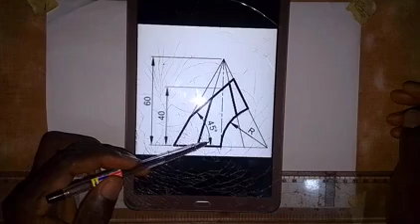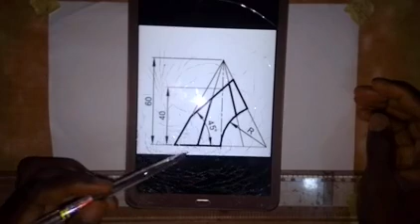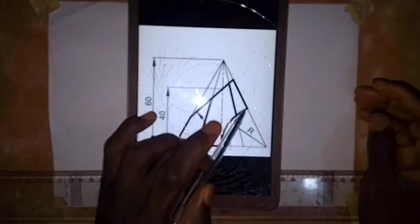This line is the cutting plane, at an angle of 45 degrees to the horizontal. This radius is half of the total distance from here to here, which is supposed to be the distance across corners, though it's not written here, so I'm taking it as 60 millimeters. So the distance across corners is 60 millimeters, which means the radius of this curve here is 30 millimeters, as the curve touches the center line here. So we are going to produce the surface development of this truncated hexagonal pyramid.

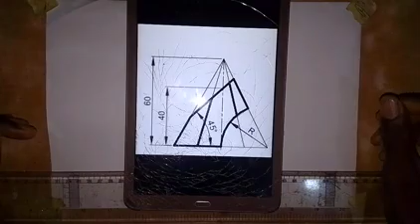Now let's go and see how this work can be done.

The first thing we are going to do is draw a vertical center line. Vertical center lines are drawn with a thin long chain line, always make it a thin long chain line.

Then we also have the horizontal center line.

We are going to take a measurement of 30 millimeters. If the distance across corners is 60, you take 30 millimeters, put it at this point, and then draw a circle. I'm not going to make the circle more visible, so it's okay like this, but I believe you can see it.

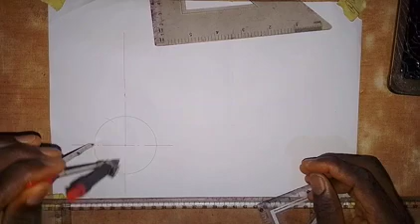With the radius I used to draw this circle, put the pinpoint here, then draw an arc up and down the circle. Then put it at this point and draw an arc up and down the circumference of the circle.

The next thing we are going to do is join these points together.

I just want to do the surface development, so I'm not doing any other thing with this question, only the surface development.

For the hexagonal base, I'll produce it like this. I'm not going to make it thick lines, that's why I'm not using the black pen, I'm using the red pen. So we connect these points together.

Just for us to produce the given view, which is the front elevation. Alright, so we have this. I just want to get the front elevation.

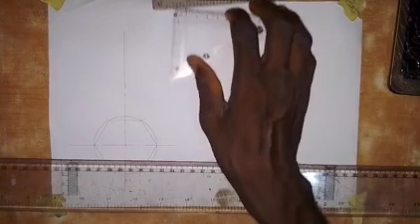Come up a bit and then draw this horizontal line. Then we take a measurement of 60 millimeters, then take 40 on the center line.

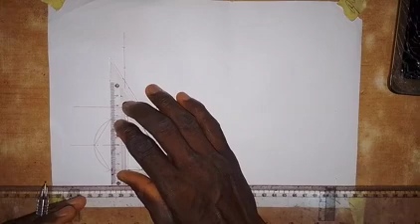From this point, draw a vertical line to touch the horizontal. Then draw a vertical line here to touch the horizontal line. At this point, you draw a vertical line to touch the horizontal.

Then we join this together with the apex of the pyramid. We also join this together with the apex of the pyramid, and then we join this together with the apex of the pyramid, and this one too. So we have this.

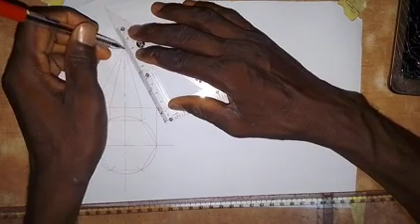With that 40 we have taken, we take our 45 degree set square, set it at this point where we have that 40, and draw the cutting plane. This is the cutting plane here, as we see it in that drawing.

We take our compass, put the pinpoint at this point here, and extend the pen point here. So we draw the curve. Okay, so this is it.

This part has been cut off, this part has been cut off. Let's make the remaining part more visible.

Alright, so this is what we have left. So we want to develop this part, that is what we want to do. So let's take the seam XX, let's take this point. That means we are cutting it here and opening it. That is what we want to do now.

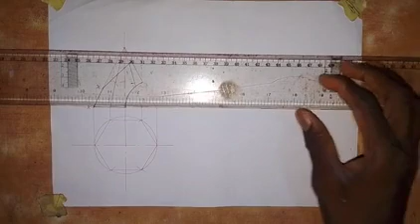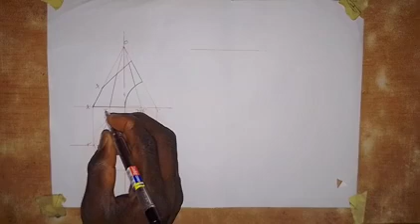So to do that, to draw the surface development, we come here like this and draw a horizontal line. If this point is point O, and I number this point here, this is 1, this is 2, this is 3, here is 4, this is 5, and this is 6. So here we have 1 prime, this is 2 prime 6 prime, and this is 3 prime 5 prime. Then we have this point to be 4 prime.

Alright, let's take note of the numbering we have done. So this is also point 1, this is 2,6, this point here, and this point is 3, so this point is 3,5, and then this point is 4. Let's take note of that. So that means this point will be point O, the apex of the pyramid.

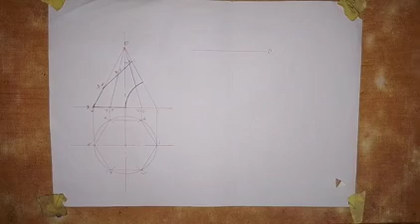So all we have to do now is to take the true length. This is the true length, since the corner is on this horizontal. So this line O1 prime is the true length. We take this distance, which is true length. You take it like this, take it here like this.

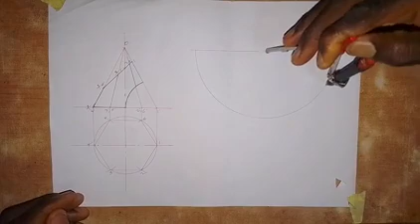Then we put the pinpoint here at point O, which is the apex of the pyramid. Then you draw an arc like this. So draw this arc. Alright, having drawn the arc, so what we are to do now...

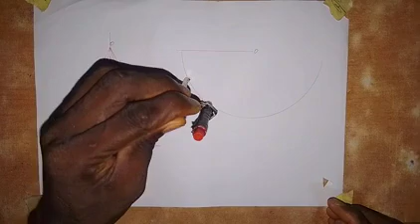You take distance 1 to 2 on the plan, which is the length of the hexagonal base. So you put the pinpoint here, make an arc, 1, we are making 6, so this is 2, come to this point, this is 3, come to this point, here is 4, this point is 5, and this point is 6.

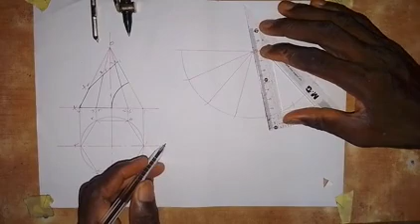Okay, so we are going to connect this point together with the apex. So we connect this together with the apex. We also connect this together with the apex, and this one together with the apex. So this point, we connect it together with the apex, and this one we join together with the apex. And lastly, for this one, we join it together with the apex.

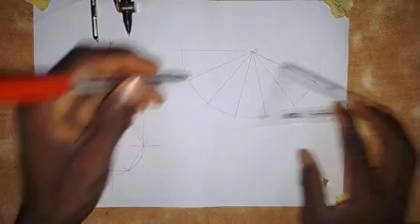Alright, so the next thing we are going to do here is this. Part of this has been cut off, okay, so let's leave it here like this. Or okay, I can just connect this together, but let's number it.

So we are opening from 4, so this point is 4. We are going to have 4 at this point, and we also have 4 at this point. So what follows 4, 3, and 5? Here we have 3, and then this will be 5. Then next we have 2 and 6. Then we have 1. Alright, so that's what we have there.

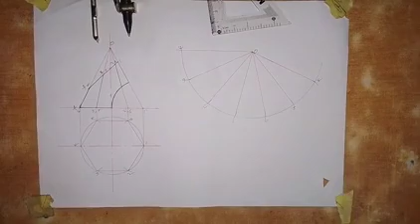So partially I will join the points together with straight lines. So we join this together. I will join 2 and 3 together like this, then we join 1 and 2 together. Okay, then 6 and 2, then 5 and 6. So we may still need to take in some part, but let's make it like this first.

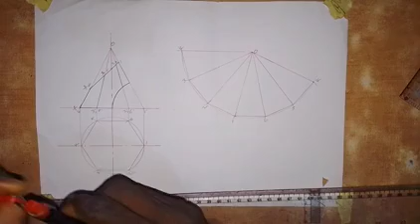Alright, so if we are opening, this part that is cut off up here, let's work it out. Put the pinpoint of the compass here at point O, extend to this point 4. This is point 4, extend it here, put it at this point O here. Then you make an arc here on 4.

Then we have 3 and 5, so put the pinpoint here, extend to this point 3 and 5. Put it at this point O here, make an arc on 3, make an arc on 5. Next we have 2, 6, which is this point.

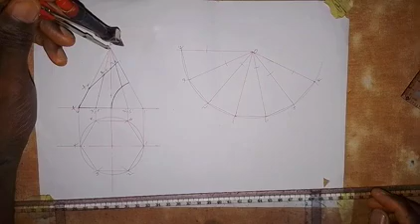Okay, so we put it here, make an arc on 2, make an arc on 6, and lastly for 1. Okay, so this is 1, so put it here, make an arc on 1.

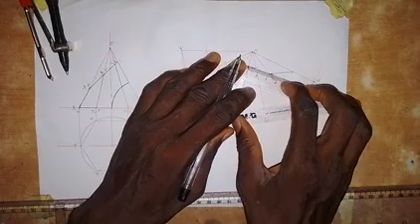All right, so we are going to join this together with straight lines. We are joining for pyramids, so we use straight lines. Pyramids and prisms, so we do use straight lines, not French curve. But for cylinders and cones, we use French curves to join the points together. Okay, let's take note of that.

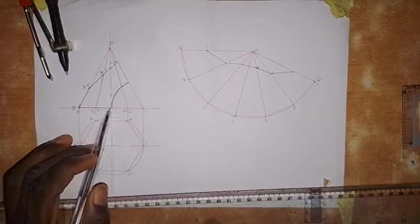All right, so we have this now. Now let's work this out. This point that we have here is for 1, this is for 2 and 6. Then we have the center. So this center now, we need to locate it. It is between 5 and 6 and 2 and 3. So we need to locate this center, this point.

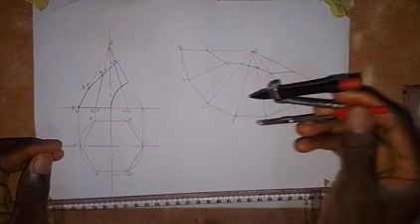Okay, so what we have to do is take this distance from here. From 1. So it will take it from 1, from 1 to the center here. So we have 1 here. So this will land us on 2. No.

Okay, so let's get the point. From here, let's get for 1. So put it at this point, then we make an arc here on 1. So we have this for 1. Then for 2, 6, extend it to 2, 6 here. So put it at this point, so this is 2. And then here is 6. Okay, so we have this.

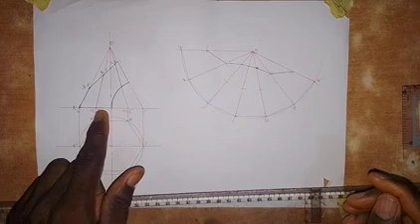Then this point that we have here. All right, so we are going to take this distance. We come on to this point 6 here, 6 and 2. So we take this distance from here to here, that is from 2, 6 to this center here. So we take that distance and put the pinpoint at 2, so we make an arc here on this line. Then we put it on 6, so we make an arc here on this line. All right, so that's what we have there.

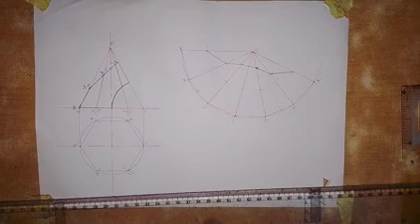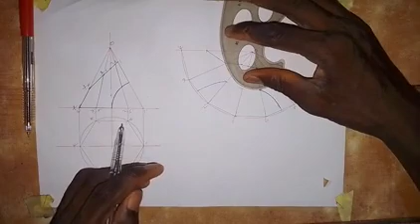So what we are to do now is join this together as a curve. So we join this together as a curve like this, and then we also join this together as a curve. So we join this together as a curve like this. Okay, and for this part, we also have this curve here. All right, so this is what we have here.

So then for this, we make this a thick line. Then from here to here, make it a thick line. We also make this a thick line, and then we make this a thick line from here to here. All right, other things we have to do: this line, make it a thick line. We also make this line a thick line from here to here, and then this line, make it a thick line from here to here. Also this line, we make it a thick line, and then this line, make it a thick line from here down, and then this line, we also make it a thick line.